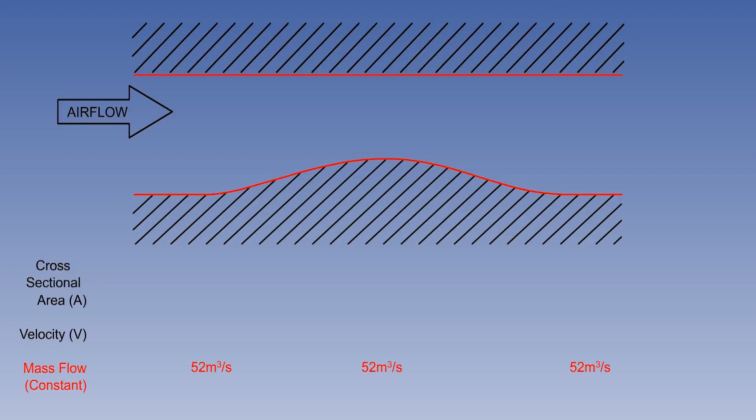This is the basis of the principle of continuity, and to demonstrate its effect on aerodynamic theory, we will consider a stream of air flowing through a tube which has a reduced cross-sectional area in the middle. The air's mass flow, or mass per unit time, will be the product of the cross-sectional area of the tube, A, the velocity, v, and the air density, ρ.

The mass flow will remain constant at all points along the tube. The equation of continuity is A times v times ρ equals constant. Because air is a compressible fluid, any pressure change in the flow will affect the air density. However, at low subsonic speeds, less than Mach 0.4, density changes are insignificant and can be disregarded.

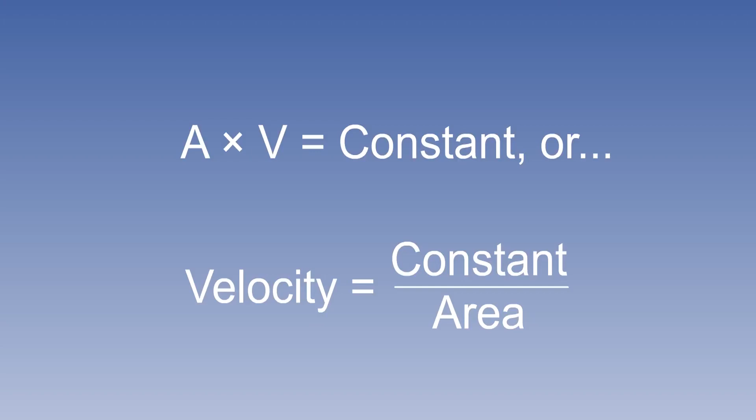The equation of continuity can now be simplified to A times v equals constant, or, when we rearrange it, velocity equals constant divided by area. Because the mass flow must remain constant, it can be seen from the equation of continuity that the reduction in the tube's cross-sectional area results in an increase in velocity, and vice versa. The equation of continuity enables the velocity changes of airflow around a given shape to be predicted mathematically for speeds below Mach 0.4, which is around 260 knots at sea level.

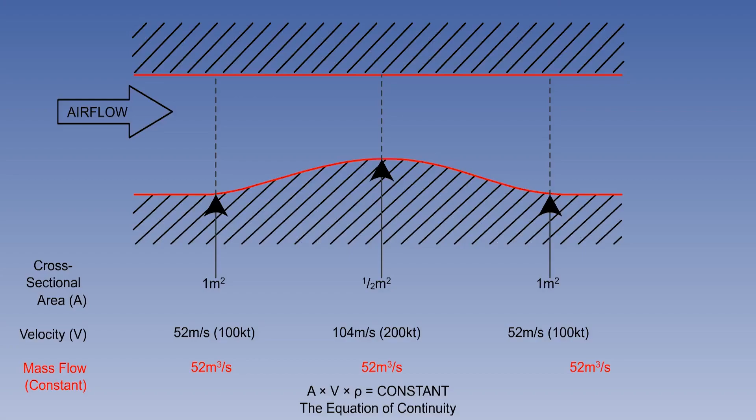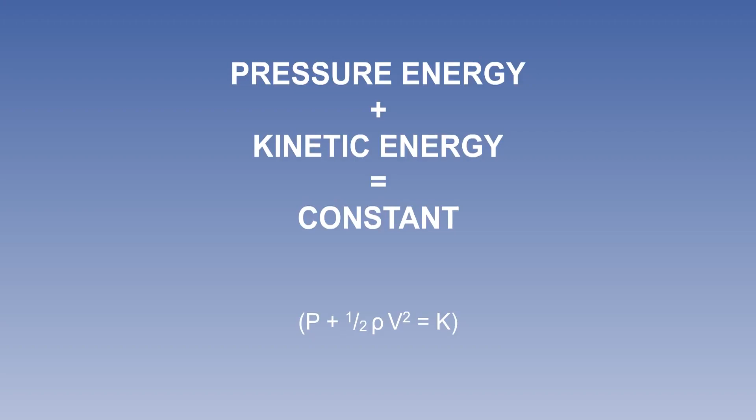Associated with the principle of continuity is Bernoulli's theorem, propounded by 18th century Dutch-Swiss mathematician Daniel Bernoulli. His theorem states that, in the steady flow of an ideal fluid, the sum of the pressure and kinetic energy per unit volume remains constant, or, more concisely, the sum of the energies present remains constant. In this context, an ideal fluid is both incompressible and has no viscosity. The theorem can be expressed as pressure plus kinetic energy equals constant, or P plus half ρ v squared equals K.

Let us consider a mass of air at ISA conditions, moving at 100 knots or 52 meters per second. Static pressure is 101,325 newtons per square meter. Density 1.225, giving a dynamic pressure of 1656 newtons per square meter. Pressure energy 101,325 plus kinetic energy 1656 equals a constant 102,981 newtons per square meter.

Because the velocity of the airflow at the throat has doubled, its dynamic pressure has risen by a factor of 4, and the static pressure has decreased. But the total pressure, the sum of static and dynamic, has remained constant. This constant can be referred to as total pressure, stagnation pressure, or pitot pressure, according to context.

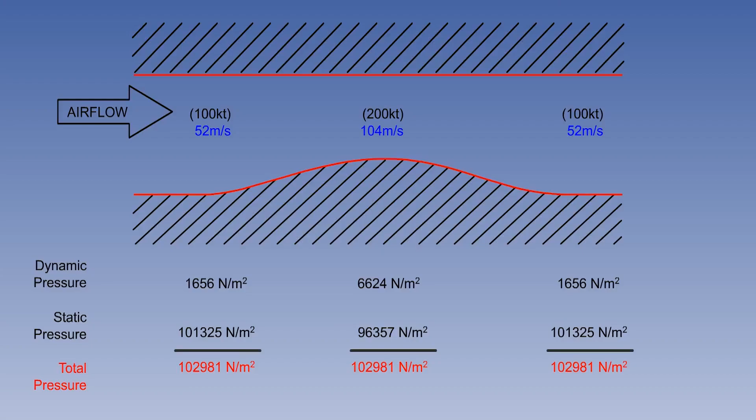The tubes used in the diagrams just shown are used only to demonstrate the principle of continuity and Bernoulli's theorem, and are not devices which could make an aeroplane fly. However, an aerodynamic force to oppose and exceed the weight of an aircraft can be generated by a specially shaped body called an aerofoil. The airflow over the top surface of a lifting aerofoil will be at a greater velocity than that beneath, so that the pressure differential will result in a net upwards force per unit area. The bigger the surface area, the larger the force generated.

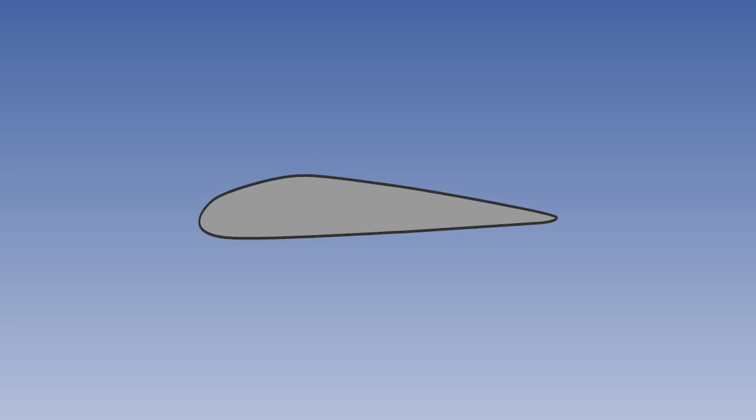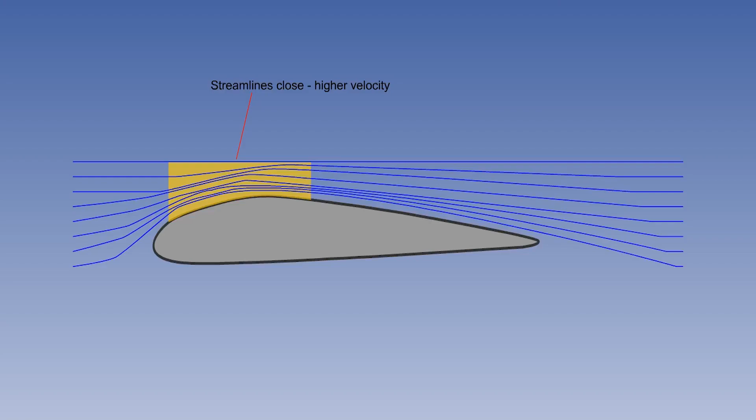Next, we shall see the similarity between the flow over the aerofoil and the flow through the tube used in describing the principle of continuity and Bernoulli's theorem, and that these fundamentals still apply to aerofoils. A streamline is the path followed by a particle of air in a steady airflow, and one streamline cannot cross another. When they are shown close together, it indicates increased velocity, and when wide apart, decreased velocity. When streamlines diverge, it indicates decelerating airflow and the associated rise in pressure. And converging lines, acceleration with decreasing pressure.

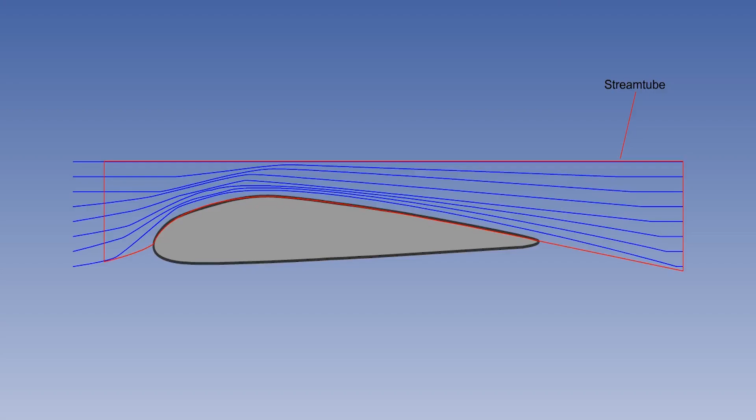A stream tube is an imaginary tube made up of streamlines. There is no flow into or out of the stream tube through the imaginary walls, only a flow along the tube. This concept will help you to visualize the airflow around an aerofoil. To grasp the basic principles of aerodynamics, you will need to understand the principle of continuity and Bernoulli's theorem. We can summarize the relevant elements as follows.

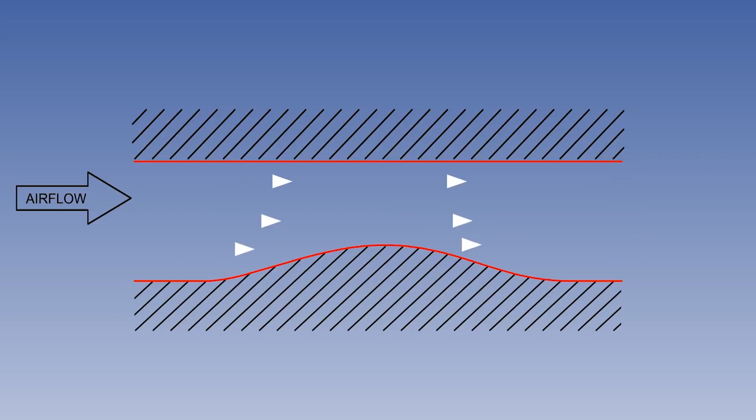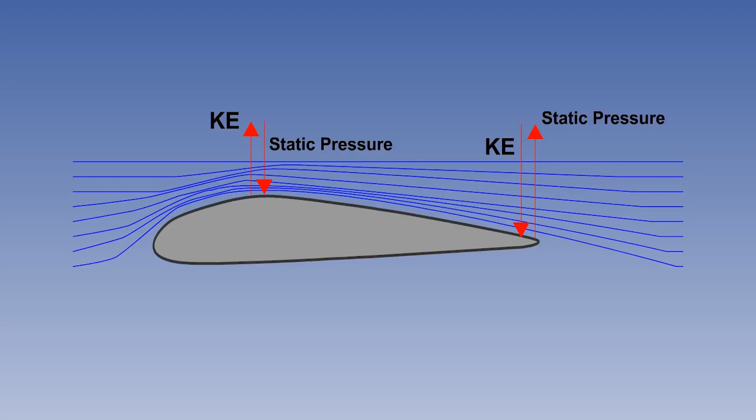By the principle of continuity, air accelerates when the cross-sectional area of a streamline flow is reduced, and decelerates when it increases. By Bernoulli's theorem, if a streamline flow of air accelerates, its kinetic energy will increase and its static pressure will decrease. Conversely, if air decelerates, the kinetic energy will decrease and the static pressure will increase. Additionally, it should be remembered that these pressure changes will not affect air density at speeds below Mach 0.4. By using these effects, an aerofoil can generate the aerodynamic forces required for flight.